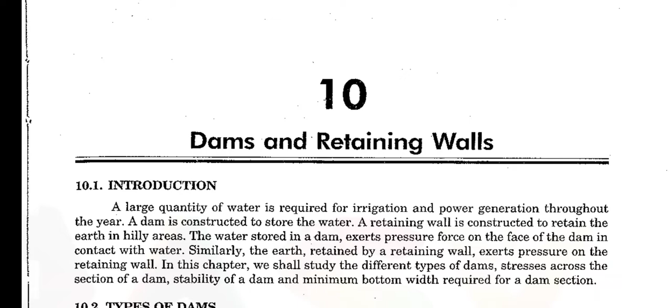Today we are going to see Unit 3, that is stability of dams. First we will see about dams, what forces act upon them, what are their types, and how to find the resultant force. Lecture 2 will cover problems related to the forces applied on dams and the stresses acting on it. Then in lecture 3 we will see how it is going to be stable, that is stability of dams, conditions for stability of dams. Let's enter into the lecture.

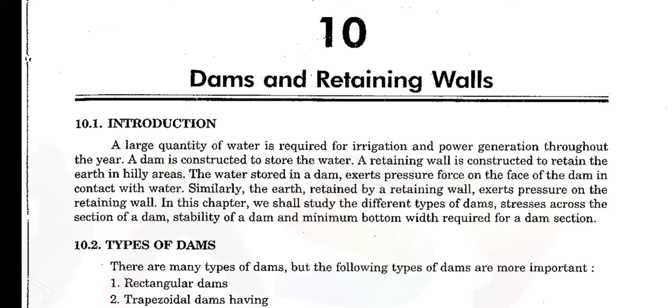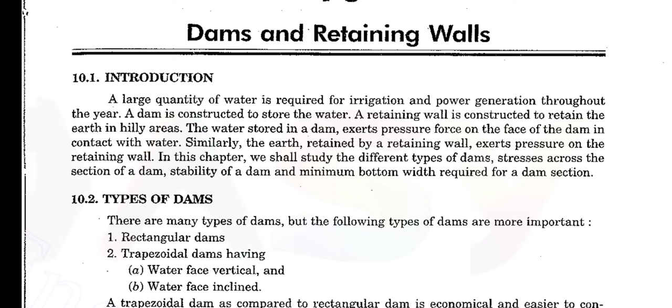A dam is a structure which retains water on one side, and it is used to store rainwater. What are the types of dams? There may be many types of dams.

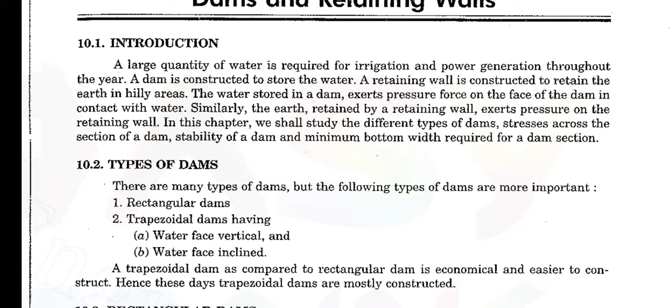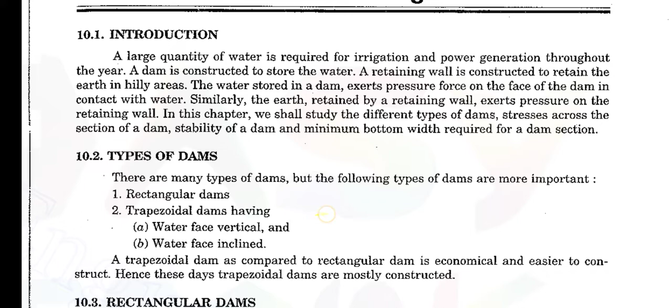The classifications are based on shape, that is cross section shape: rectangular dam and trapezoidal dam. The water face can be vertical, that is on the side of the water - if the dam is horizontal or vertical it is called vertically faced. Another one is inclined face. Let's see one by one.

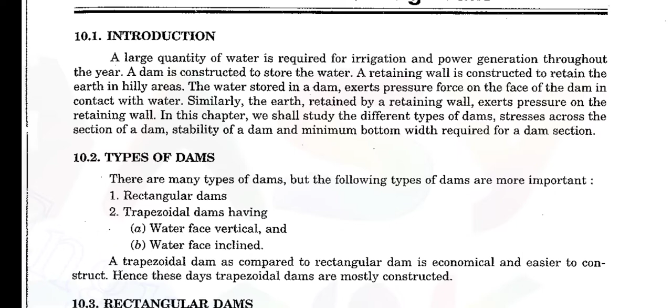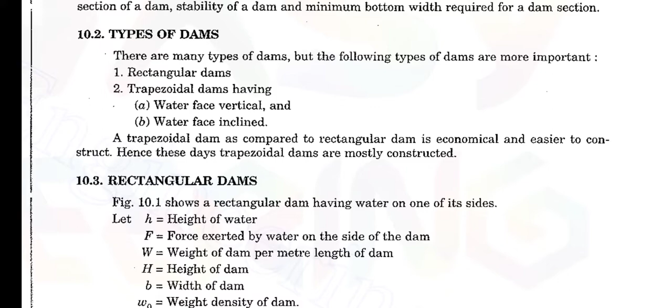First is the rectangular face. Compared to the rectangular, the trapezoidal is economical and easier to construct. Hence these days trapezoidal dams are mostly constructed. Now let's see the rectangular dams.

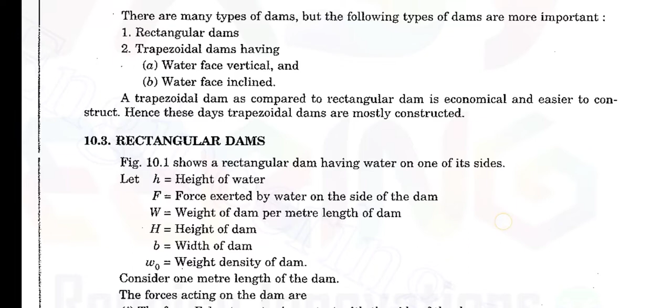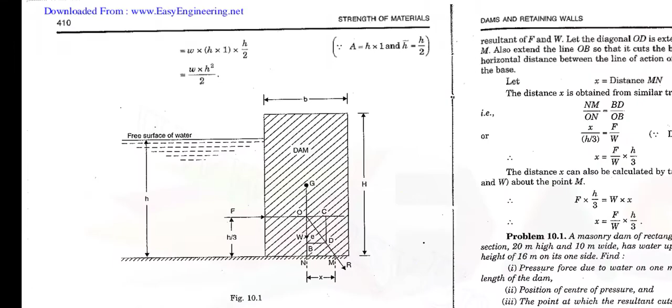So what are all the forces? First let's see the diagram showing how a rectangular dam will be. You can see that this is the water side and this is the free side. This is a rectangular cross section shaped dam.

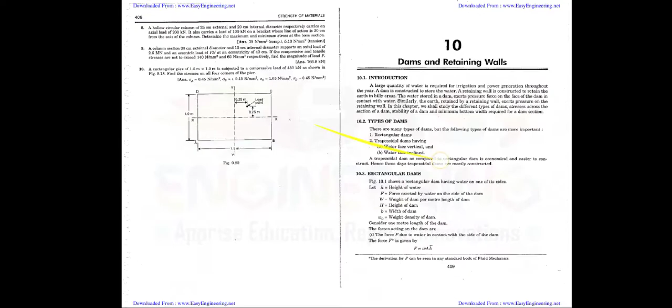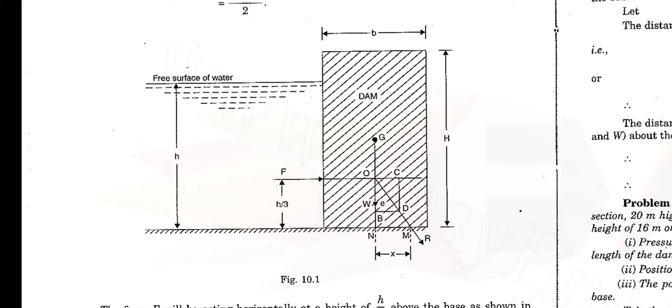It has a width of b and height of h. In this you can see that clearly the center of gravity of this rectangular shape will be at this middle point G, middle G point.

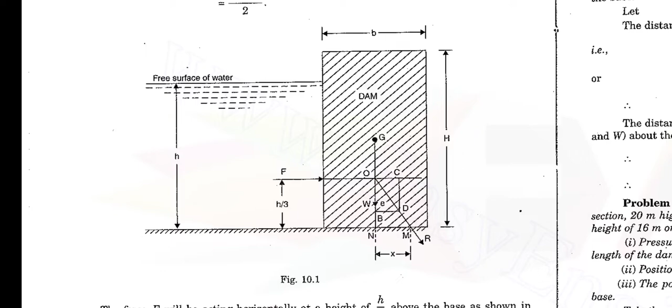You can see the water standing at a height of small h. The total hydrostatic pressure acting on the water over the dam will be equal to force F, the hydrostatic force F - this is the first force acting on the dam. Then about the CG point, the weight of the total dam will be acting in the downward direction. So this will be horizontal force, and W will be the vertical force. The resultant of these two forces, horizontal and vertical, will give you the resultant force.

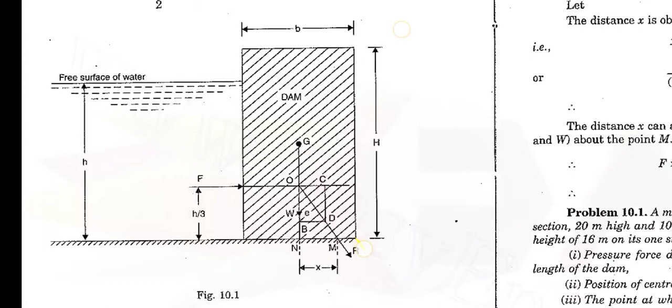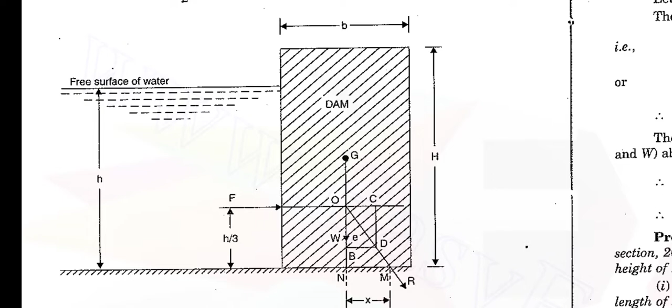Now the step is to find out this x distance, that is the point where the resultant force acts - we have to find that, it is called eccentricity. Next is what are all the stresses acting on the dam at this corner and at this corner. These are going to be derived. Now let's start with the derivation.

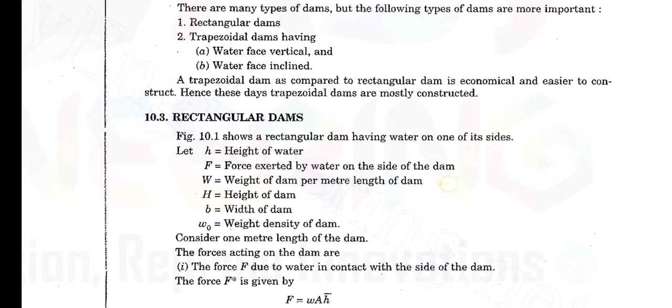So what have we seen? The height of the water is small h. The force acting due to the water is F. The weight of the dam per unit length is W. Height of the dam is capital H. Width of the dam is small b, and weight density of the dam is W naught.

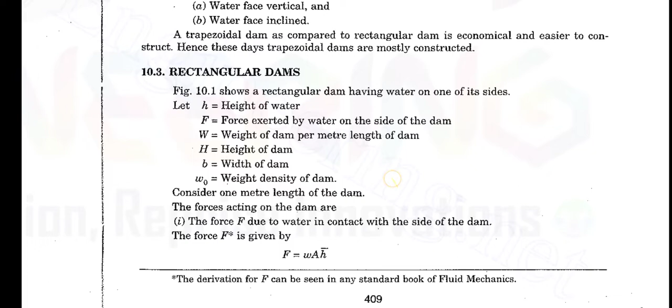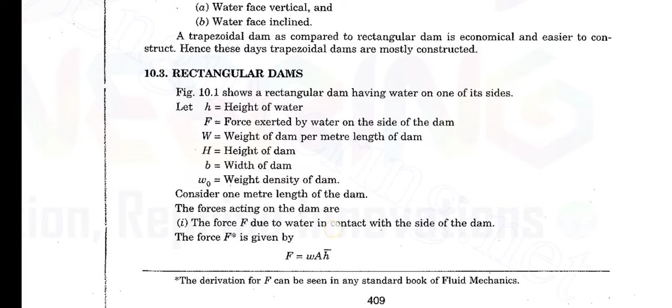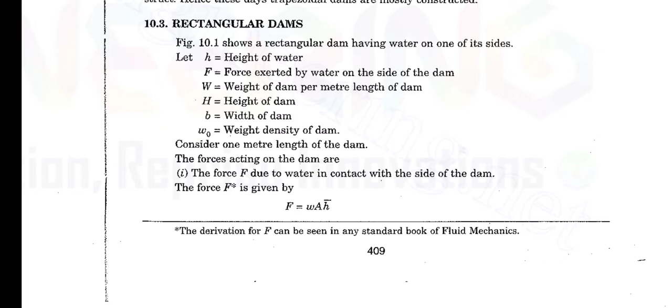First, the force of water - the formula is W into A into H bar. Here W is nothing but the weight density of the water. This derivation can be seen in the fluid mechanics book, but I will also state how it happens. A is the area of contact on the dam. Then H bar is the CG point at which the force acts.

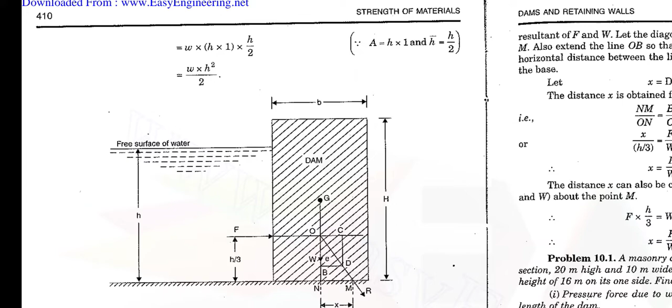H bar is the CG point of the wall, that is G, placed nearly at H by 2. So it will be equal to W into H square by 2. This is the total force acting on the dam. Then we have found out F, now we have to find out W.

What is the force W? W is nothing but the weight of the dam, weight density of the dam into volume of the dam. Weight density is W naught, and volume is nothing but area into length. So the area of the dam is B into H.

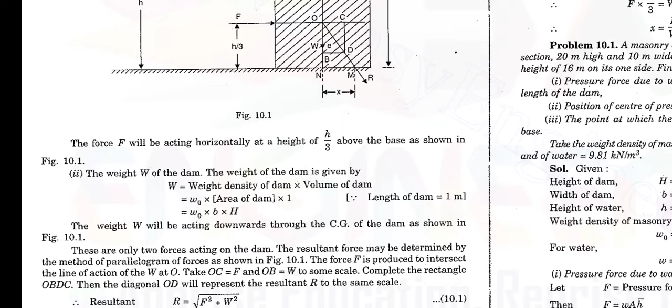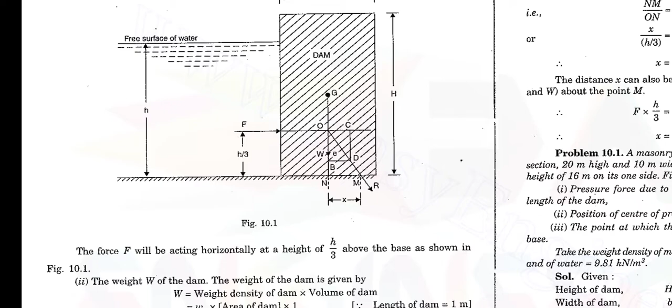That is capital H into B, the area of cross section into the perpendicular distance taken as 1 meter, so the length of the dam is 1 meter. So B into H into W naught is going to be W. So these are the two forces, W vertically downwards and F horizontal.

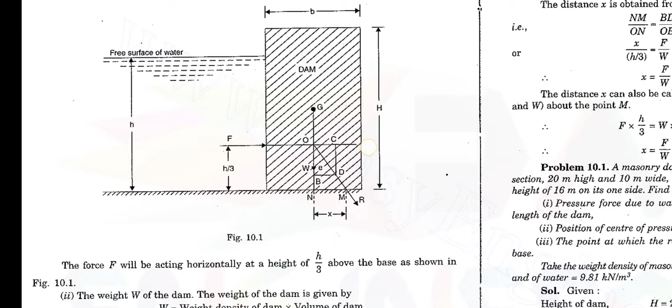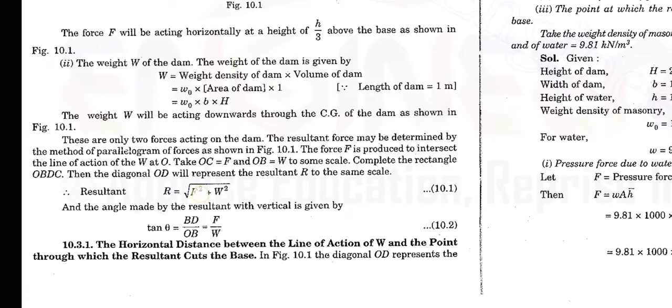Now you have to find out the resultant force. Resultant force is nothing but square root of F square plus W square. You can see this is vertical and this is horizontal, so the inclined will be the hypotenuse. So R is equal to square root of F square plus W square.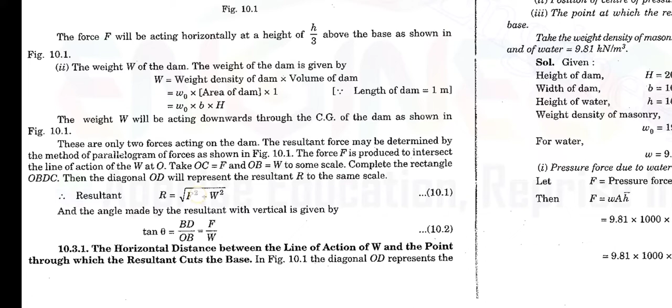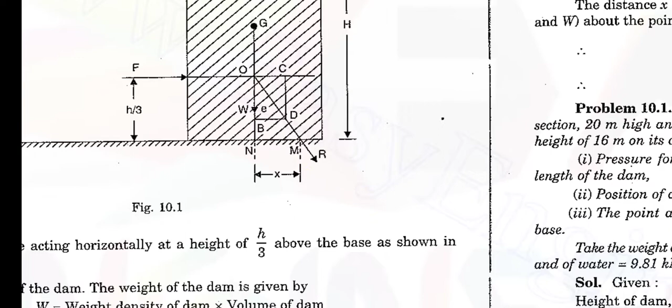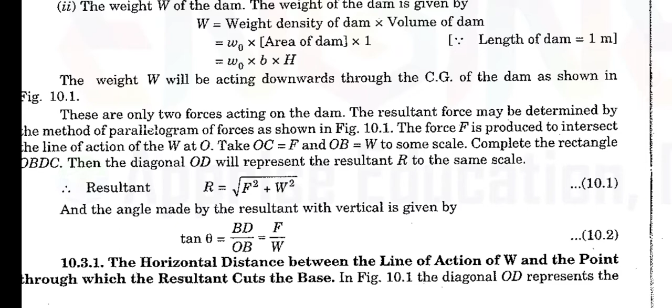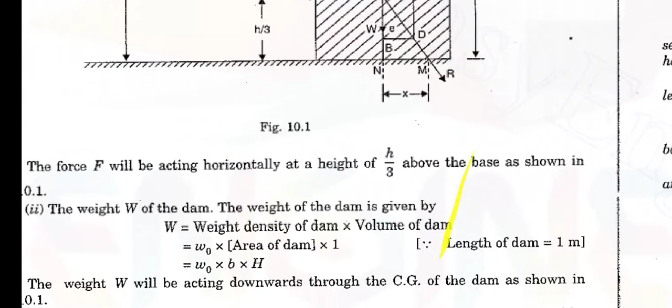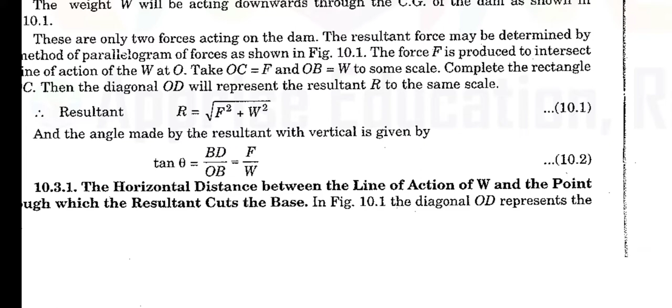Sorry, BD divided by OB, adjacent side by opposite side by adjacent side. So with this we find theta, where BD is nothing but the horizontal force, that is capital F, and OB will be the vertical force, that is W. So it will be equal to F by W.

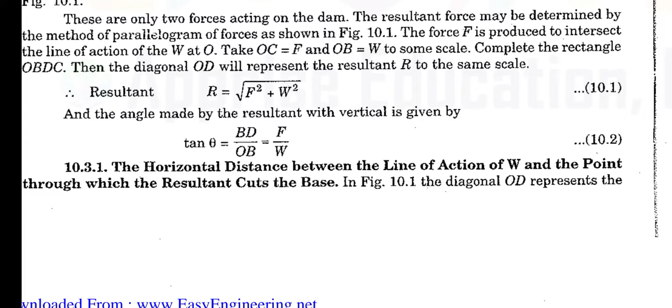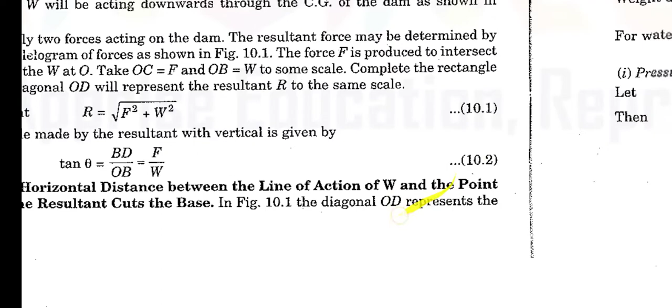Then the horizontal distance between the line of action. Next we are going to find out this X distance, that is where the resultant is going to act, that is the X distance. So the resultant X is nothing but the distance MN.

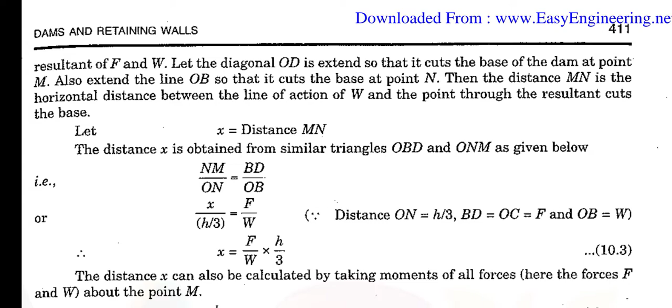The distance X is obtained from similar triangles OBD and ONM. We can see the triangle OBD and ONM. This big triangle and also this small triangle, these two are similar triangles.

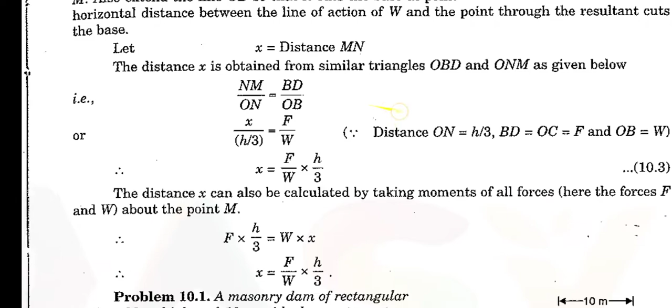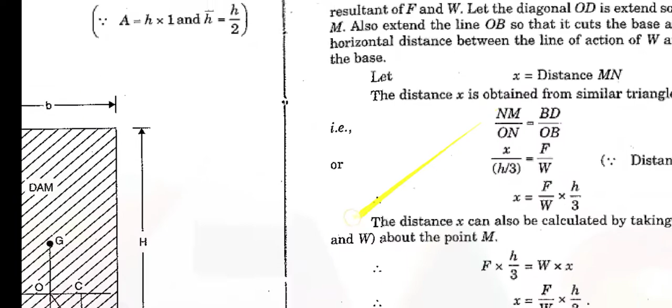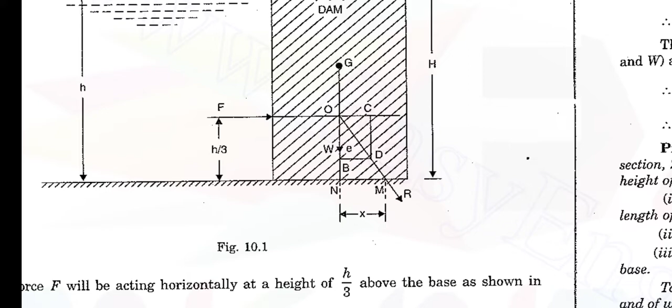With this, the ratio is NM by ON is equal to BD by OB. NM is the horizontal distance, and ON is the vertical distance, so horizontal distance divided by vertical distance will be equal to BD divided by OB. This is OB and this is BD, and this is NM and this is ON. So NM by ON will be equal to BD by OB.

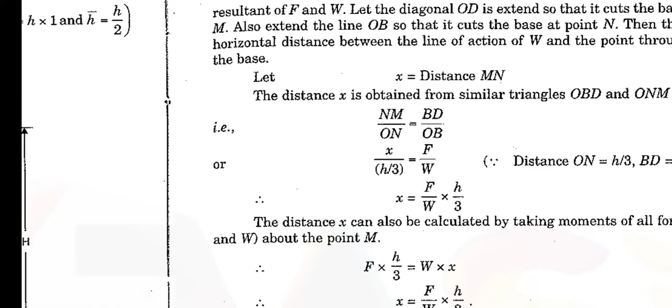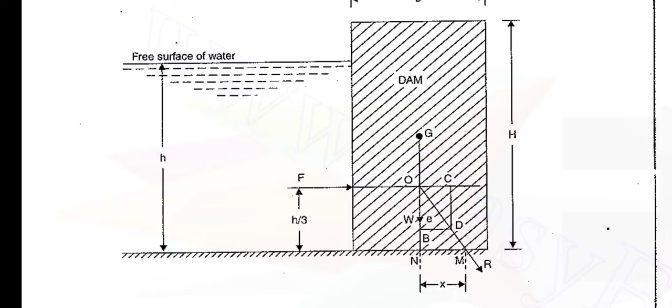So here NM is nothing but the x distance, and ON is the distance, that is h by 3. The hydrostatic force will always act one third of the height from the bottom. You can remember this, it will always be h by 3 distance from the bottom, so ON is h by 3.

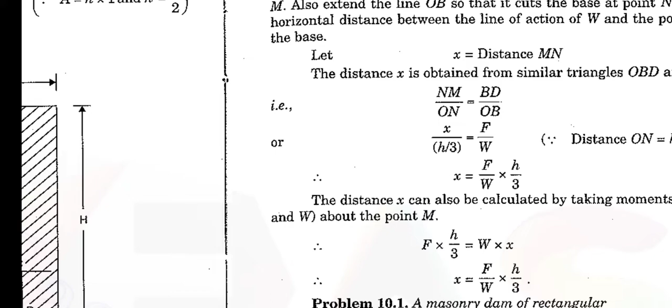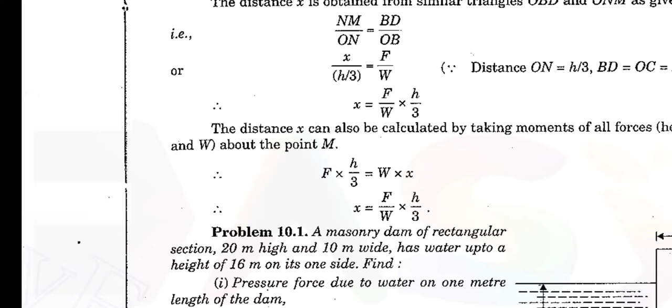Here BD by OB is equal to F by W. With this, x is equal to F by W into h by 3. So this is the total x distance we are going to find out. These are the steps in the derivation of the rectangular dam. Thank you.